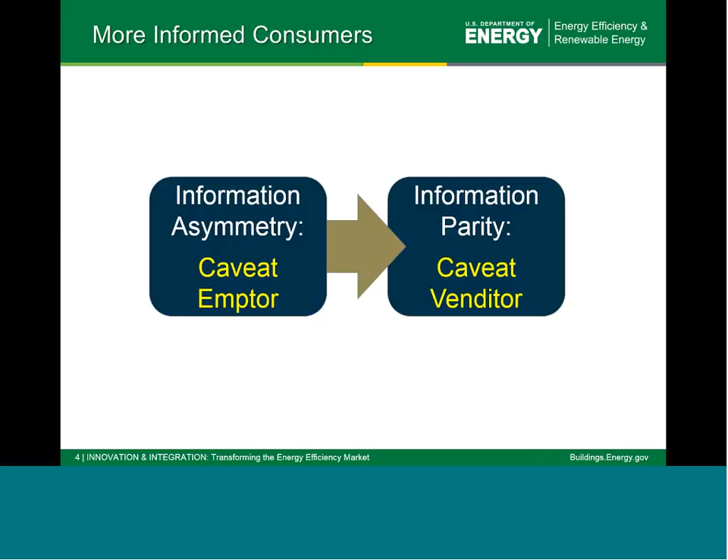What's really been a transformation in the marketplace has been this move from information asymmetry, caveat emptor, where buyers know less than sellers, to information parity, caveat venditor, where buyers know as much as sellers. We're seeing more and more that there are so many different business models being substantially impacted by this transformation. Let's look at some of the things buyers will know that will affect us.

One of the things buyers will know for sure is thermal defects. A good infrared diagnostic camera used to cost about $30,000 or more. Today you can get a good one for a few hundred dollars, and there are ones even less that you can clip onto your smartphone and get reasonably good infrared images of homes. That's significant because infrared images are really effective at communicating defects to a lay audience like a homeowner.

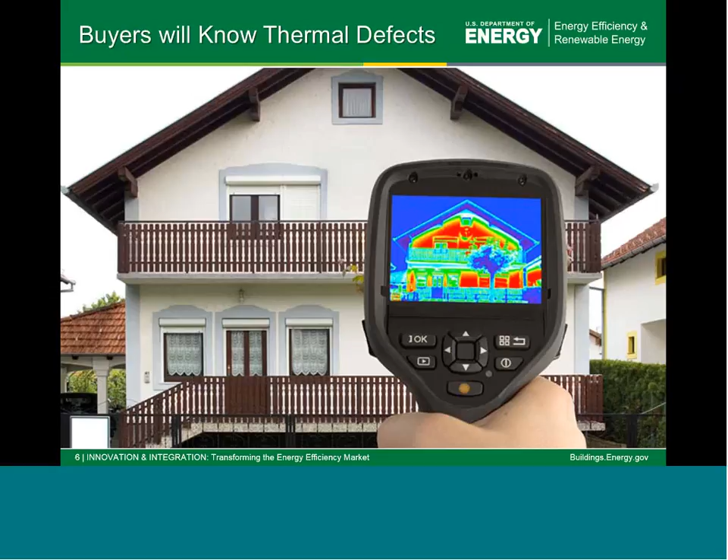I don't have to be an expert homeowner to look at this image and know something's going on that's wrong in my house. In infrared images, light colors are heat and dark colors are cold, and on a cold day to see all that heat exploding out of the wall system is not a good thing. So that's one thing the infrared camera can do, but it's an even bigger thing how it's going to spread. And it's just one example of one business.

Essess is a company out of a group from MIT that's developed not just an advanced way of doing camera diagnostics, but an advanced way of using computer technology to interpret the images from the camera. So what this company does is they strap a really good camera to the top of a RAV4.

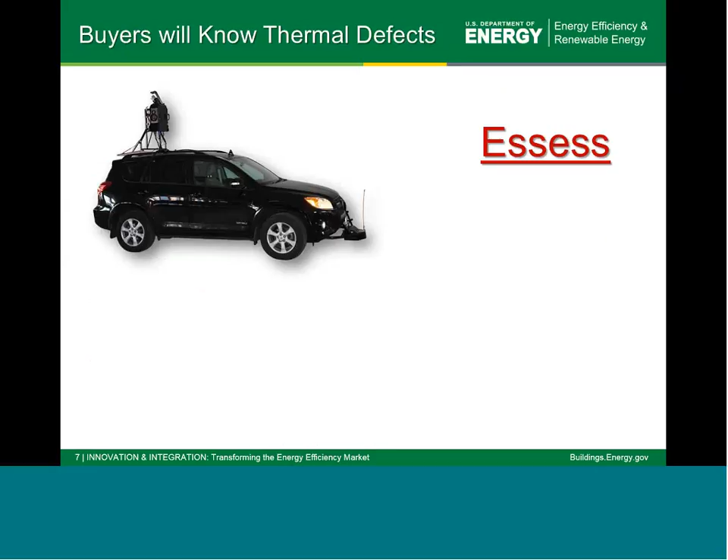They can drive through an entire community in 1 or 2 days and virtually map that community, getting images home after home. In this case, Cambridge, 2 nights, an entire diagnostic of all the buildings in that community.

Of course, the red on a cold day is not good to see heat coming from the buildings, and the blue is better that the heat's being contained inside the building. So for a utility client, you'd have a great way of knowing where

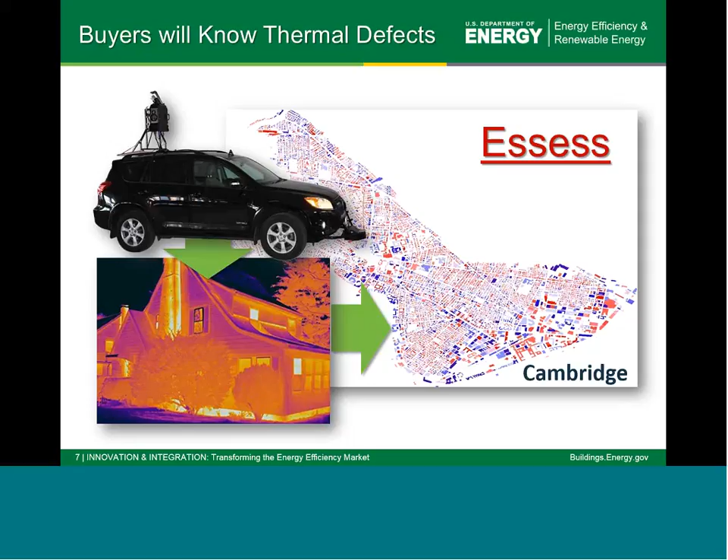to focus efforts to reach out for retrofit work. But the key thing is the interest in this company to virtually do reports on homes and communities across the entire country. So again, buyers will be so much smarter about thermal defects in homes.

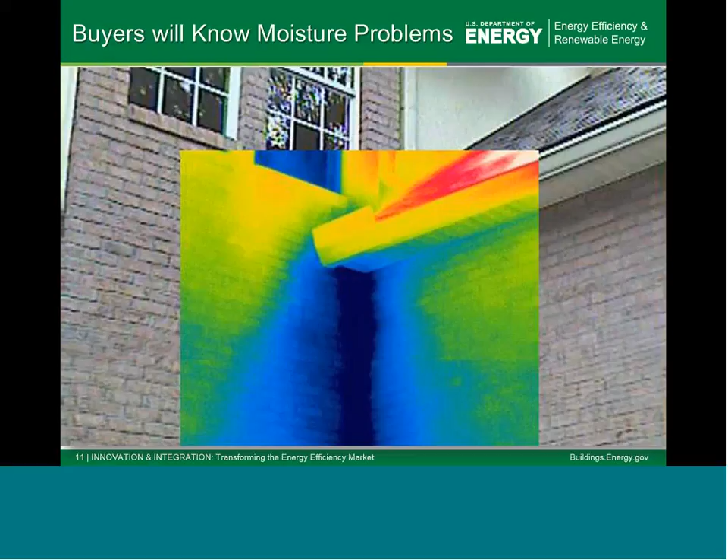And I would submit that there's an incredibly high percentage of residential construction without kick-out flashing. Even worse is the percentage of construction without pan flashing at windows and doors. 100% of windows and doors leak, so if they leak and they leak at the corners, we know that there's a real high-risk opportunity for moisture damage if we don't have good water protection details.

So the confluence of those two defects, and we know moisture problems as consumers, that will affect the value of buildings and our willingness to buy these buildings as well. And the same diagnostic on the inside will show where these moisture problems are being realized internally, and we can see them as well there.

So again, we know thermal defects and moisture defects. We're also going to know a lot about indoor air quality because we'll be smarter buyers, because very simple applications for smartphones and computers will be able to tell us in an instant where we have issues with key contaminants

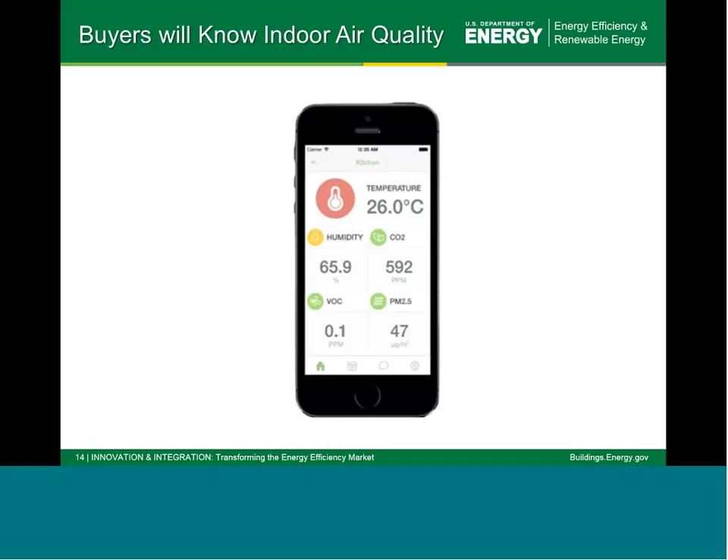that occur in our homes. Humidity, CO2, volatile organic compounds, particulates—those indicators will show up on our very simple applications that we get on our phone. Sensors are getting lower and lower cost, and all these applications are already appearing in the market, even bigger, more dashboard-type designs for showing the air quality in our homes with alerts and all sorts of other information to make consumers smarter. So we will be smarter about indoor air quality.

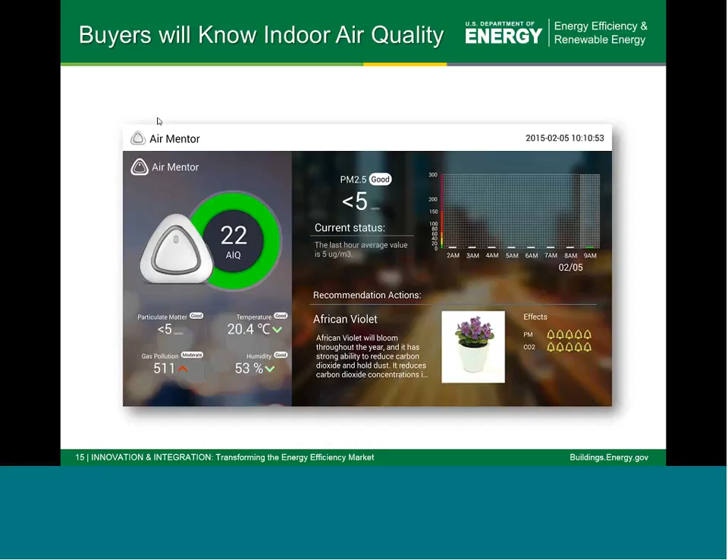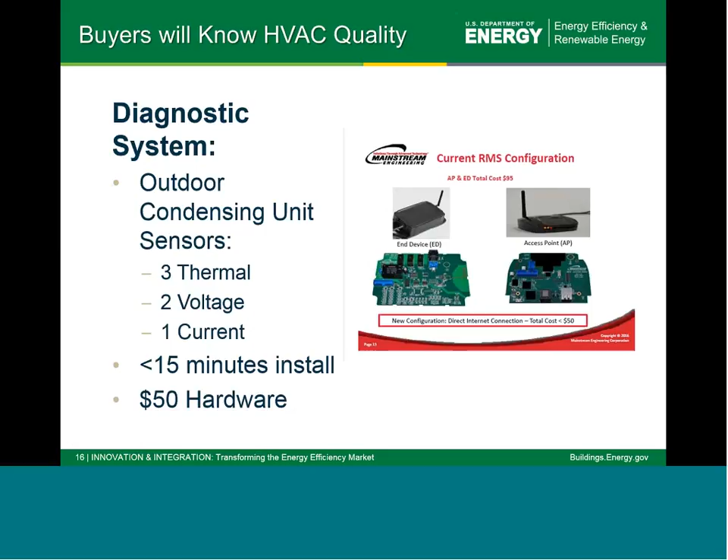And they basically put these on the equipment for 15, 20 minutes and then hook you up through the internet to their monitoring devices. They can tell you if you have low or high charge, failed start or run capacitor conditions, reduced condenser or evaporator flow for refrigerant, abnormal operation, and if your performance isn't meeting what you were promised when you bought the home or new equipment.

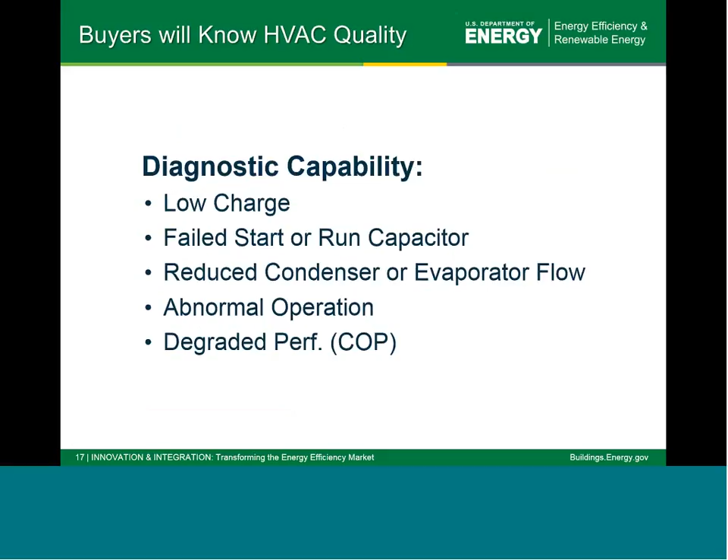So now, where we have a reality that systems aren't installed per manufacturer specifications, we'll have a much increased capacity for consumers to be smarter about whether they got what they paid for. So lots of new challenges for remodelers and building owners, and dashboards will appear here too that help consumers know when things are not as they should be.

All this will lead up to eventually where we start having more ability for consumers to get reviews of homes. Right now it's pretty limited, but my wife and I won't go to a restaurant in a new area without pulling up Yelp or TripAdvisor and getting reviews, menus, and information that makes us smarter picking a restaurant. Well, that's just a $20 or $30 meal. This is a $300,000, $400,000 purchase.

You can be sure that the review options for what we can check will get higher and higher. It's great when they're good reviews, but there are also going to be lots of bad reviews. We as builders have to be conscious that this is a smarter consumer that will know how our buyers feel about our product, and they'll also be smarter about the performance of homes.

We have a lot of great labels in the marketplace, and these labels will be used at a higher and higher level. We have the energy efficient label with Energy Star, the HERS rating, Zero Energy Ready, PHIUS, green labels like LEED and NAHB, Water Sense as a water label, Indoor Air Plus for air quality, and fortified as a disaster resistance label. All these labels will grow in awareness.

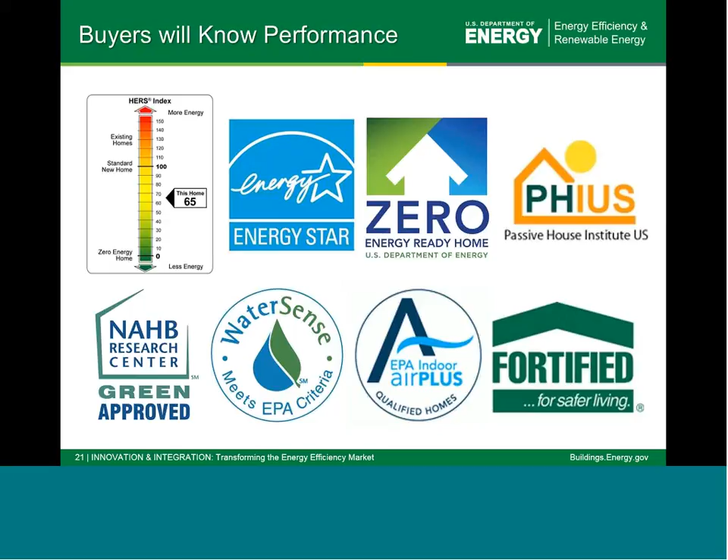Consumers will know that there are simple triggers to make them smarter about what they're buying. Again, a much smarter consumer, and they'll see these labels as builders get wiser to posting them in an aesthetic and obvious way when people come up to their homes, or at least the model homes for sure. So we will know more about performance.

One more thing about these smarter consumers is that they're willing to pay for a better experience, particularly if it's transformational. Consider some marketplace realities: we pay 2 to 3x for a daily break we think is better. When we go to Starbucks or another boutique coffee shop, we're spending $4, $5, $6 for coffee versus a third or half the price at a discount convenience store. For the experience, we'll spend 2 or 3x for a better daily break.

Similarly, for health, we're showing over and over that we'll spend 2x or 3x for a better health experience. Before Chipotle made the mistake of not controlling quality, they were easily 2x for fast food versus a conventional fast food restaurant. You can just look at the marketplace spending $40 billion a year on organic food, $20 billion on bottled water. The willingness to spend for health is everywhere we look.

And when we do a great job of combining technology and design, 10x is an easy price increase we see. We were very happy with our cell phones, then out came the smartphone, and we lined up around the block to spend 10x to go from a cell phone to a smartphone. A transformational experience has an incredibly high willingness to pay if we're smart about what we're getting. So just that as a beginning to our discussion, it's really important to recognize we're getting smarter buyers.

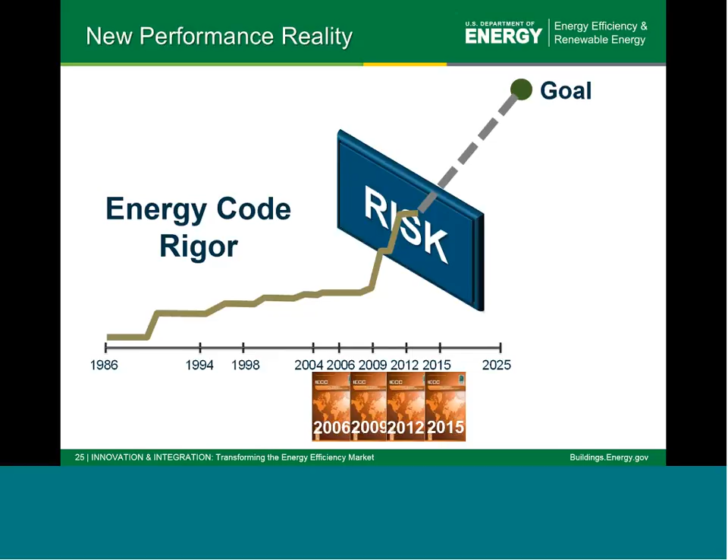But right at the juncture we are at today in terms of how efficient we make our homes, I'll say we've hit a new risk reality that has to be addressed, and that drives a lot of the benefits for doing zero. Let me explain how that works.

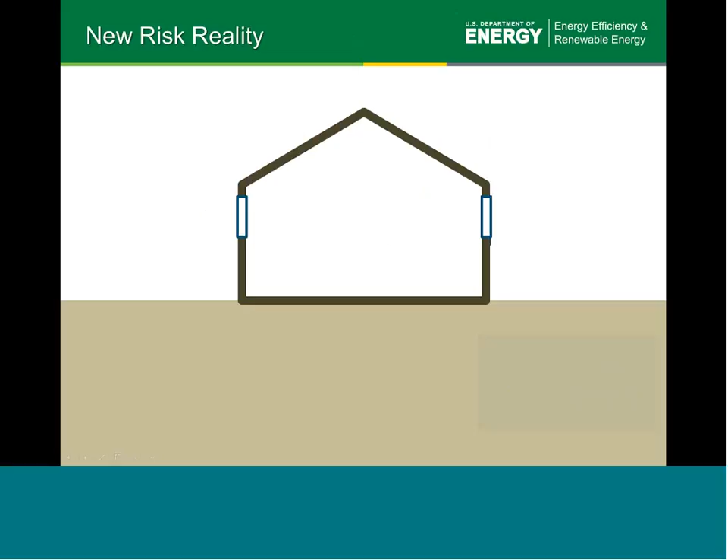We used to build with much less insulated, much less rigorous windows and air sealing. Then along comes more rigorous codes, with movement to much lower HERS index scores. With that comes more insulation, better windows, and more air tightness. That's what I call the advanced enclosure.

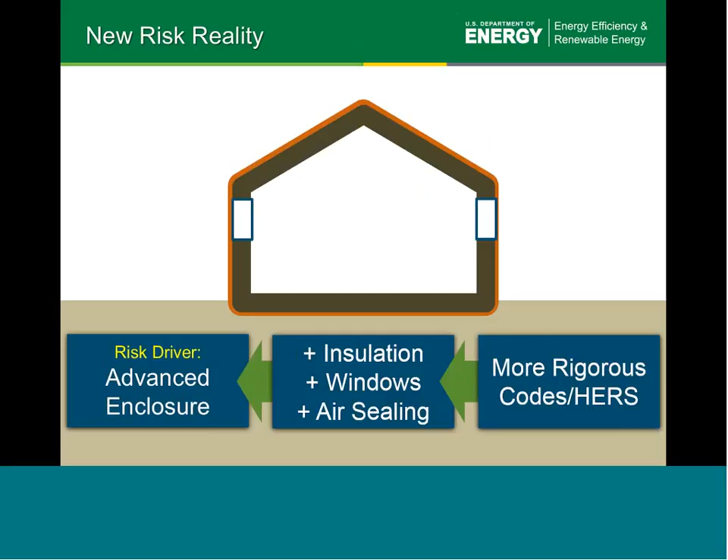And that advanced enclosure is a very significant risk driver if you have anything to do with new homes. Let's explain how that works.

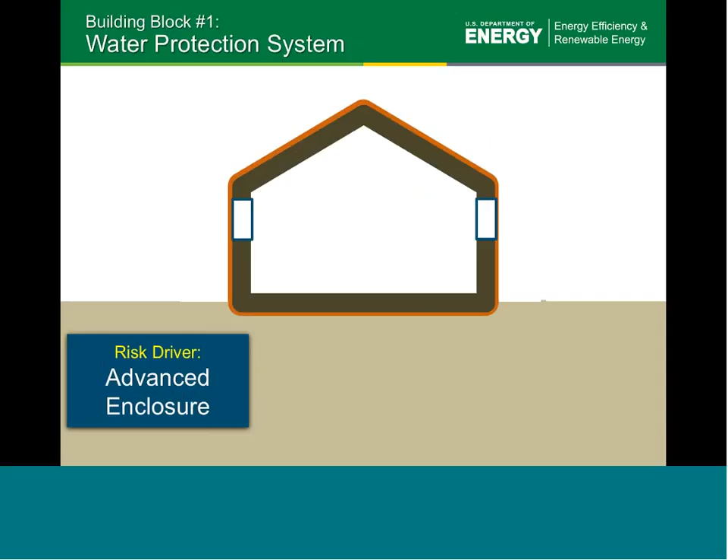First, the first building block for Zero Energy Ready homes is, because of the advanced enclosure, we need a water protection system to manage our risk. With better insulation and air sealing, we're now creating colder surfaces inside our cavity at the outside sheathing in cold weather and the inside drywall in warm weather.

Along with that colder surface, we have less drying potential. With all the additional insulation, wall assemblies cannot dry nearly as fast as they could with little or no insulation. So the challenge is we now have more wetting potential that has to be managed. It's not extra credit—it has to be managed to manage risk.

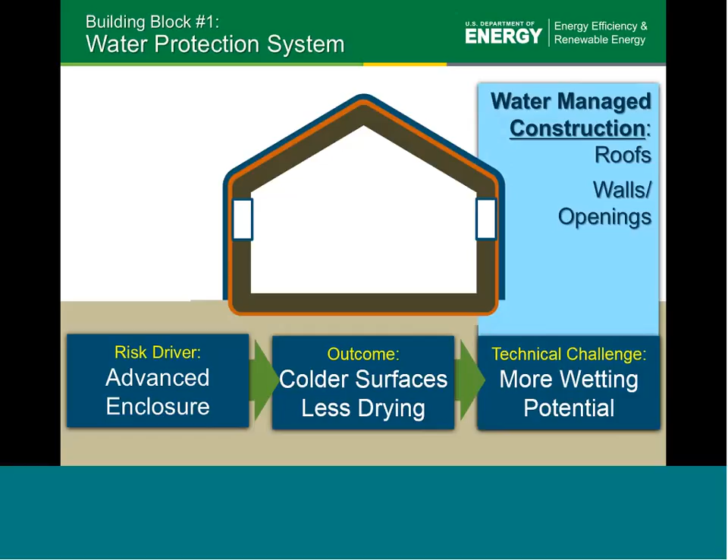So water managed construction is an absolute necessity. It's water managed roofs that have complete flashing and extra membrane details to protect the roofs, walls and openings with weather barriers and flashing details. The site and foundation have to be managed more carefully in terms of slopes and foundation details.

And then inside the home, where we have surfaces that can get wet, particularly in outside walls, we need to manage the materials and how we install them to keep water out of the wall assemblies. So water managed construction is now a complete system that has to be on every home.

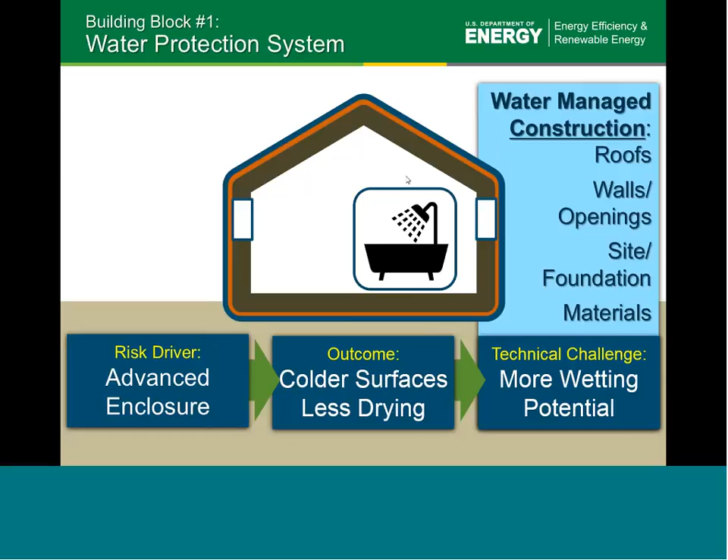We don't believe it can be driven by points. It needs to be a complete checklist that has to be addressed. Building block number 2 is managing the comfort risk with an optimized comfort system.

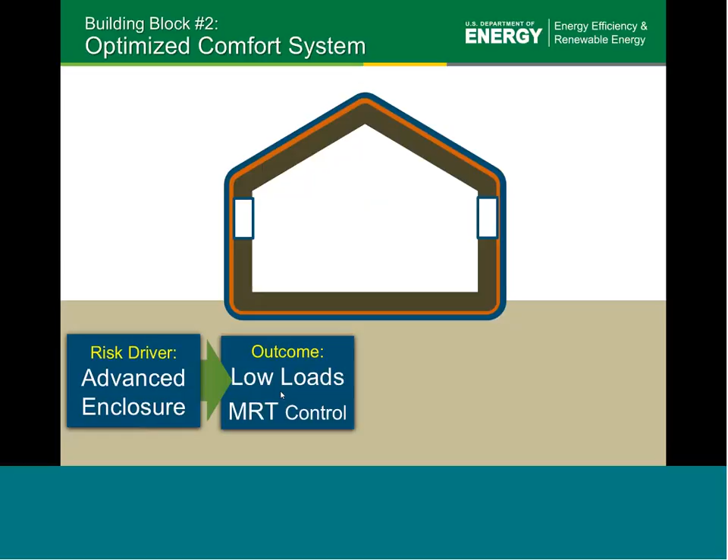Why is there a comfort risk? Well, with the advanced enclosure, we have very low loads, which is good. And with the advanced enclosure, we have much improved control of the mean radiant temperature, which is great—mean radiant temperature dominates our perception of comfort.

But what also comes along is much reduced airflow since the loads are so much smaller, and much longer swing seasons since the sensible heat gain is much reduced. When that happens, we have a challenge managing mixing throughout each room with less airflow, and a challenge managing relative humidity when we don't start sensible cooling until later in the year, even though there's latent cooling needs earlier.

So we maybe used to start air conditioning late April, early May. Now we don't do it until early June, and we have a whole month where we could still have high latent loads, meaning we have to have a humidity strategy for our comfort system. So now we need a quality installed, efficient HVAC system.

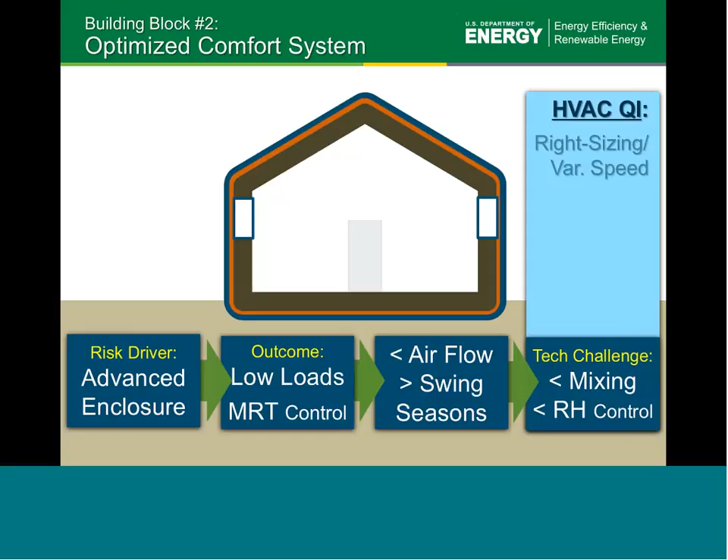It has to be right size, variable speed to manage our loads and also manage humidity capabilities. We need ducts in conditioned space for efficiency and performance. We need proper installation so the systems have mixing and balancing, and we need to make sure we're complete.

In many markets where it gets hot and humid, we need whole house dehumidification, or equipment that knows how to effectively provide dehumidification when there's no sensible load. We also need pressure balancing, because these homes have to make sure that room by room we can maintain comfort when there's a central return.

So the optimized comfort system is not extra credit. We believe it's not points. It's a whole package that has to be in every home.

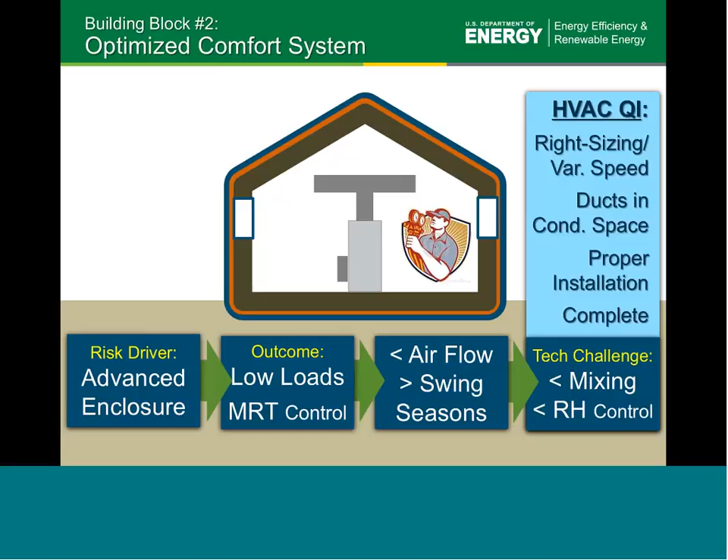Building block number 3 is a complete indoor air quality system to manage the risk of extra contaminants. With the advanced enclosure, we have less air exchange because it's tighter, and therefore we can accumulate more contaminants. So it's critical to have a full package.

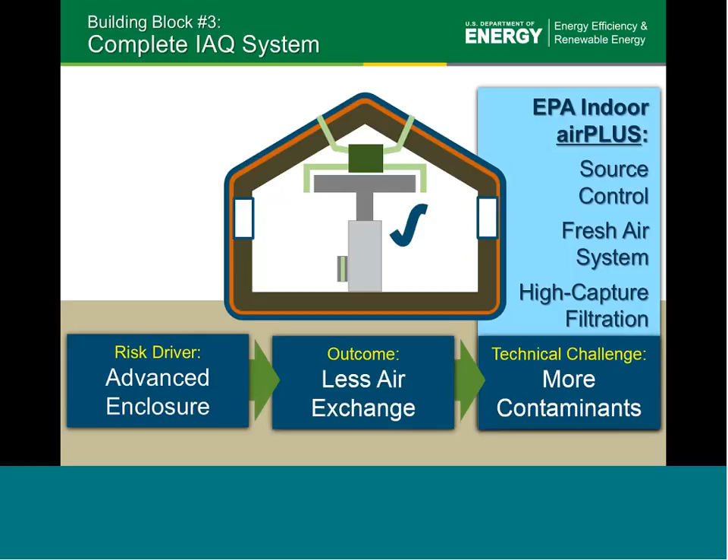We reference the EPA Indoor Air Plus package that gives us complete source control throughout the house. It also dilutes any residual contaminants with a whole house ventilation system, and has high capture filtration at the return air filter that really effectively removes particulates in the airflow. So this is a complete system that should be in every house, even a code home built today.

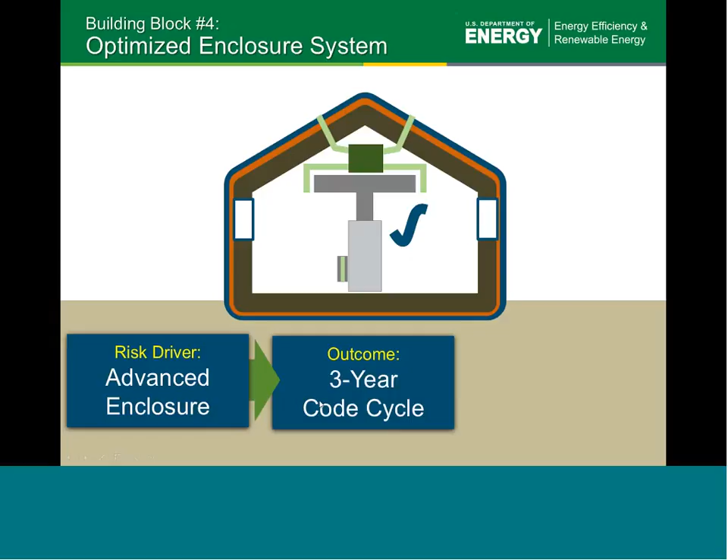Building block number 4 is an optimized enclosure system, and this is really to manage the risk of obsolescence. We know that the code cycles every 3 years, and therefore we have a challenge for near-term obsolescence. In 3 or 4 years, I can have my most expensive purchase of a lifetime be virtually illegal to build, because the next code cycle kicks in.

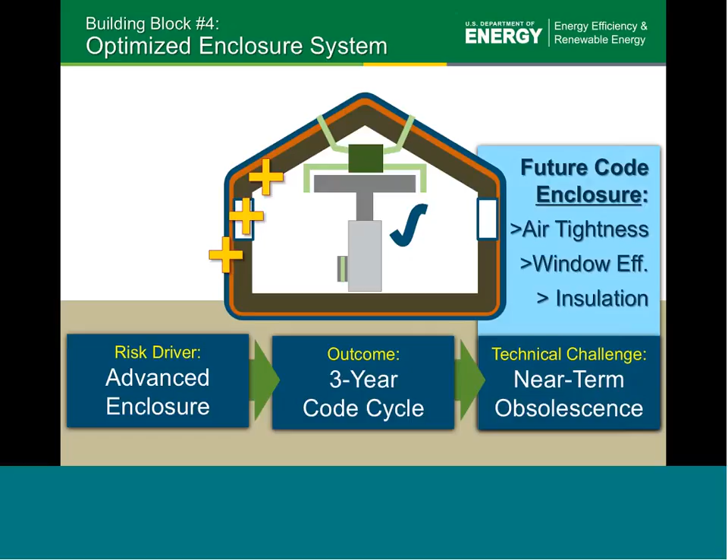So the way we manage that risk is we just build to the next code, whatever that code is on the books. For Zero Energy Ready Home, that's a 2012 or better IECC energy code, which will result in more air tightness and a better window and better insulation. That is something we believe every consumer would want, if they knew they had the choice to get the 2020 model house in 2016.

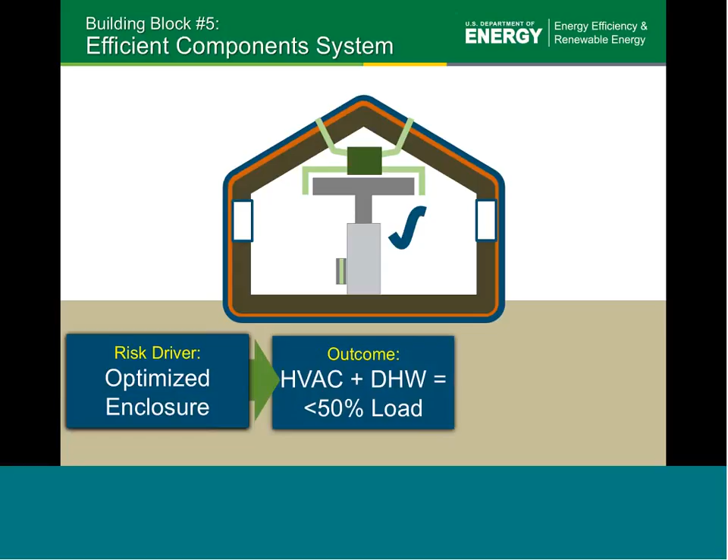Building block number 5 is to build on that optimized enclosure and put in efficient components throughout the house, recognizing that the heating, cooling, and hot water loads are now less than half our energy use in homes today that are high performance. So the challenge is to minimize the energy use of these components down to a substantially lower level, and we do that with efficient equipment, lighting, appliances, and fans throughout the house.

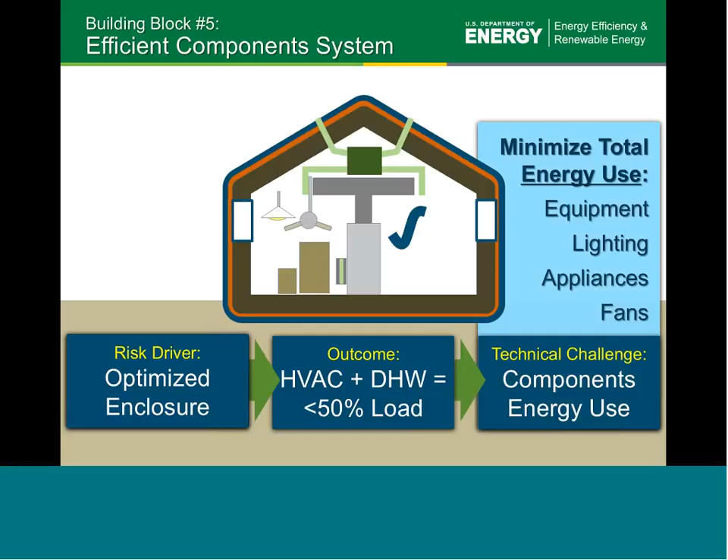The same improved energy efficient equipment also usually performs better, lasts longer, and is usually made of higher quality components that every consumer would want.

And the last building block is to recognize that the cost of solar systems is dropping rapidly. The infrastructure to provide them is increasing, while also reducing the cost of installation requirements. So every home would want to manage the risk of being able to add a solar system with minimal cost or disruption, and that's achieved with a solar-ready system.

So we start with an optimized enclosure. Now we have the ultra-efficient HVAC and components to further minimize the energy requirements down to the lowest level. And we now have the challenge to go zero ready.

We do that with solar ready construction: simple details like giving the homeowner the structural calculations that verify the roof can handle the loads of the collectors, without having to go back to an engineer at some point in the future at a very high cost.

Having a place to run wiring through conduit from the attic to the electric box, a place for balance of system components, an electric panel that has extra capacity with 1 or 2 circuit breakers needed for the future solar installation. These are very low, no-cost improvements, and now we can add the solar system with minimal disruption or cost penalty.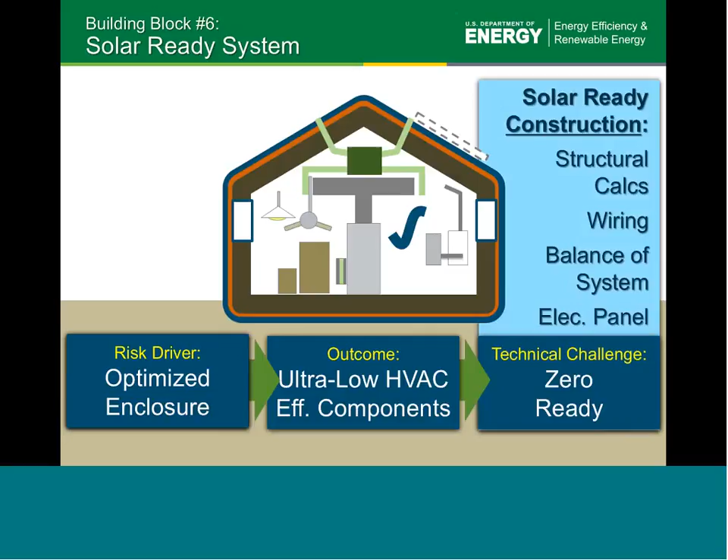So there we are. We have a zero energy spec based on 6 complete systems we believe every homeowner would want. They would want to go from an advanced to an optimized enclosure and get the 2020 model home today. They would want complete water protection, which is always a big concern of every homeowner, an optimized comfort system, a complete indoor air quality system, efficient components, and solar-ready construction, which we call a house to the power of 0.

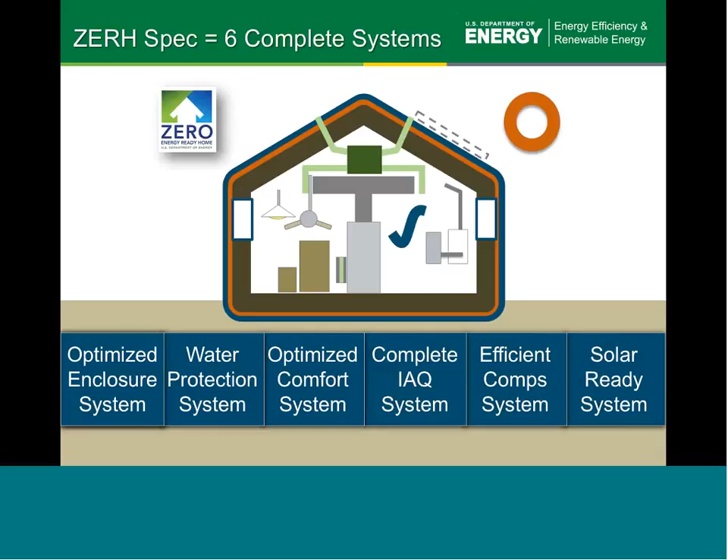The Zero Energy Ready Home basically is a way for the consumer to get this incredibly transformational experience by simply looking for a logo. That's the Zero Energy Ready Home program, and the definition is very simple as well: it's a high-performance home, so energy efficient, that all or most of the annual energy consumption can be offset by renewable energy.

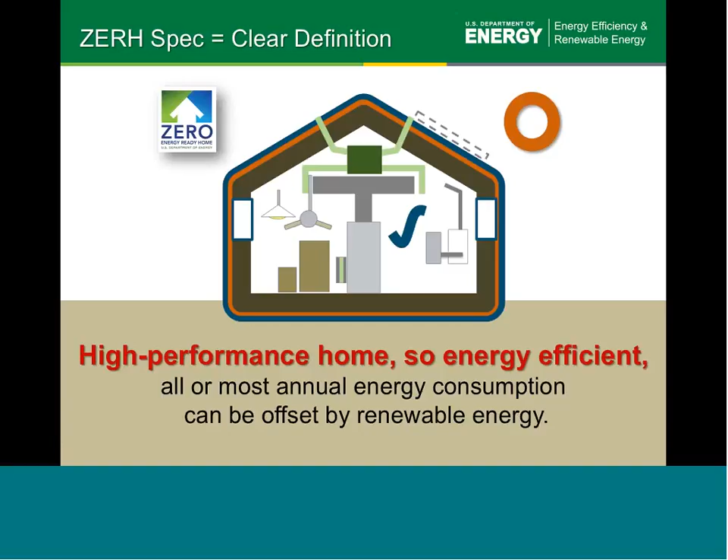Okay, so how do we message this powerful value proposition to consumers? We've used 3 principles. One is we need a simple core that we always can use to tee up our message in a way that has a very profound value to our audience. Then we have to earn their trust, and then we have to have clarity in our value message. There has to be no doubt that there's an absolute benefit they can understand without complication. So I'm going to show you how we do this very simply.

So we start with the simple core of the Zero Energy Ready Home. We thought, what is it really about Zero Energy Ready homes that's different? Yes, they're more efficient, comfortable, durable, healthy - but that's like most high-performance homes. We thought what was critically different is that it's based on the best practice and technology recommendations from the best experts in the nation, working with the DOE Building America program.

Then we further polled hundreds and hundreds of experts at a whole array of venues, asking what would they prefer - a code home, an Energy Star home, or a Zero Energy Ready home - and virtually all would choose a Zero Energy Ready home if it was side by side the same exact architectural option.

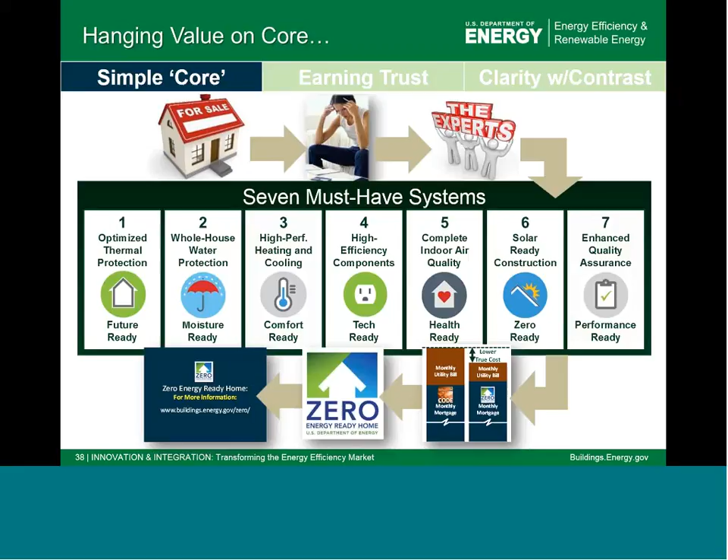So that's our very short message. It all hangs on this: this is what leading experts would choose for their own homes. And so that's our power message.

Now, trust. Nearly 1 in 3 consumers indicate they don't trust home building and real estate companies. That's the only research I can find in this industry, but my field experience shopping tens of thousands of homes worth of construction reveals it's probably more like 3 out of 4 consumers don't trust home builders and real estate companies. And it's not because these are bad people.

It's because we only buy a home once every 7, 8, 9, or 10 years. We're not out there every day having experience with that transaction. We don't know what that transaction is. We're so fearful buying homes, and there's so many steps along the way where trust is always challenged. It's more a function of this being a very difficult purchase.

And what's great with some products is the brands are powerful and consumers can just bank on them and know what they're getting, and they're loyal to those brands. That's not us. The Zero Energy Ready Home provides trust by being an independent voice of authority versus a builder saying, trust me, I'm a zero builder or a high performance builder. Now you're a builder associated with the Department of Energy's guidelines for excellence, and it's a completely different way of presenting where you are within the housing industry.

Here's an example. One builder, Newtown Builders, has since changed its name to Thrive Home Builders, is very prominently featuring Zero Energy Ready Home, when they became the first builder at Stapleton in Denver to go 100% Zero Energy Ready Home with their homes. And now it wasn't just them saying they were doing something special. They were in a select group, 1% of builders in the country, showing they can build to this level of excellence.

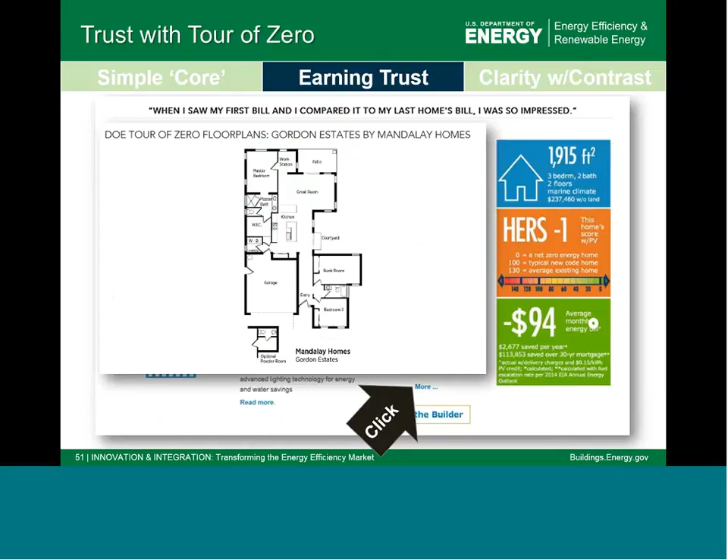Often there are videos that can be clicked on, and if you click on More for the floor plan, whatever detailed floor plans we have will be provided so people can spend more time with those. And then lastly, if you like the builder and want to meet the builder, you click on that, and it takes you to our locator tool page for that builder. All the builder partners have a page on the locator tool, so you're being featured not just on your website, but on the DOE website as a Zero Energy Ready Home partner.

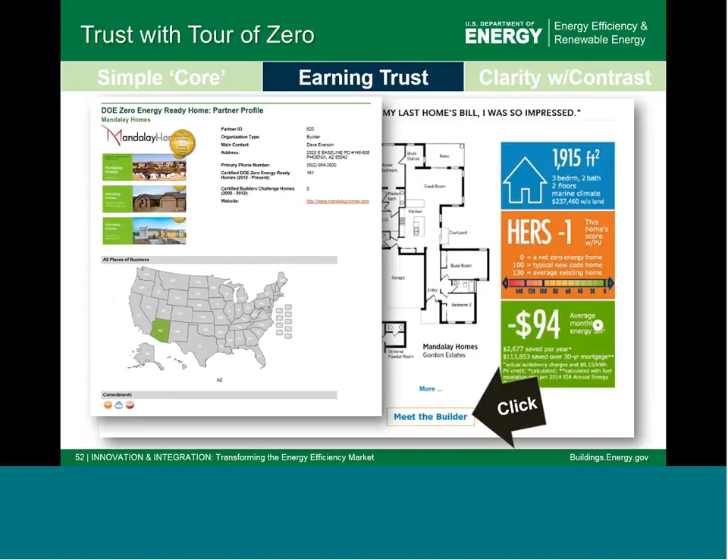Maybe I should trust this builder more. So it's another tool for earning trust.

And lastly, for earning trust, we know a lot of builders have trouble either saying messages about performance because there's some concerns about what they can and can't say, or they just want a voice of authority to have more impact. So we have drop-in messaging, two full pages of quotes that can be dropped into material.

And there's a quote, in this case from me, sometimes it's DOE, but you get the idea here that if you want to earn trust, it's great when you have others saying you're really special. So that's enough about trust.

The other thing we focused on, I mentioned, is clarity with contrast. And we have lots of things better about our homes, and they live, work, and last better. They have designer comfort and health ready. We mentioned low bills, technology, quality, enhanced durability.

But what does that really mean to me if I'm a buyer? Those are interesting concepts, and many, many programs speak to them. So what am I really getting with a Zero Energy Ready home? And then I'm also working with an exclusive builder. I have this home of the future thing that's being talked about, and so it's telling me it's a smart purchase because it's lower cost of ownership.

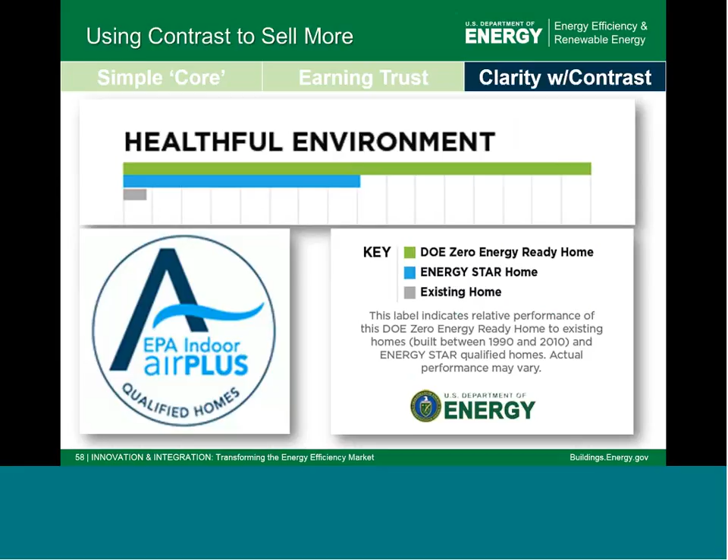Now, there are 3 bars, and the green bar is the DOE Zero Energy Ready home. The blue bar is the Energy Star certified home built to its program specs, and the gray bar is an existing home. Those points of reference are provided because you wouldn't be buying or building a Zero Energy Ready home if you weren't first Energy Star. In fact, it's a prerequisite for our program. And also, we want to make sure people understand the contrast between buying a new Zero Energy Ready home and an existing home. So those are the 3 points of contrast that we provide.

And what we're able to say in a message very simply is, Mr. and Mrs. Smith, I'm really sorry to hear that you struggle so much in your current house, but I feel great to tell you that each and every home that we build is a Zero Energy Ready home with a healthful environment. What that means is we have 100% of the recommendations by the leading experts for health in our nation, the U.S. Environmental Protection Agency. We have 100% of their recommendations for families to breathe better in their homes. In contrast, the Energy Star home has about half those recommendations, and an existing home hardly any.

Wouldn't you agree, when you're buying such an important purchase for your family, you want to have all that protection for your children? In fact, we have the Indoor Air Plus label, which also verifies we have all the expert recommendations for health in new construction. Now I understand clarity. Do I want all, half, or hardly any of what experts say should be in every new home to help us breathe better?

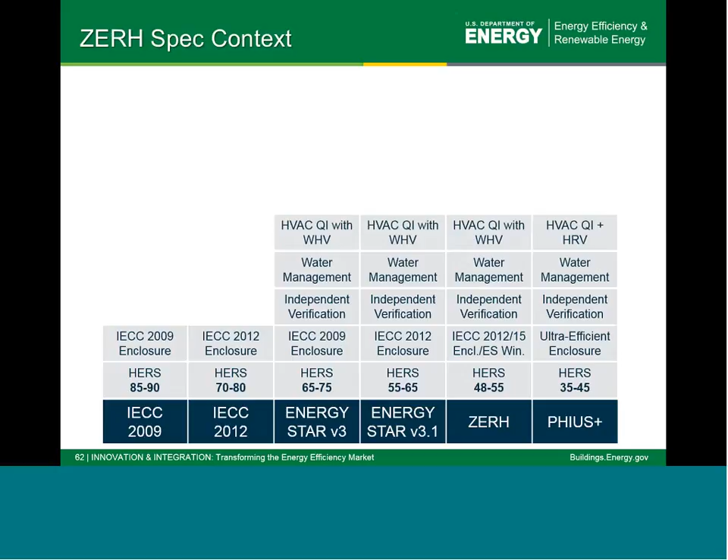Then you have independent verifications required for all the above code programs. Water management is required for all of them too, because Zero Energy Ready requires Energy Star as a prerequisite, and PHIUS requires Zero Energy Ready Home as a prerequisite, so those things just scale right across. Same thing with HVAC quality installations required in Energy Star, so it's required basically in Zero Energy and Passive House as well, along with whole house ventilation. Ducts in conditioned space is required in Zero Ready, so it's also required in PHIUS, along with the EPA indoor air package, efficient components, hot water distribution, and solar ready.

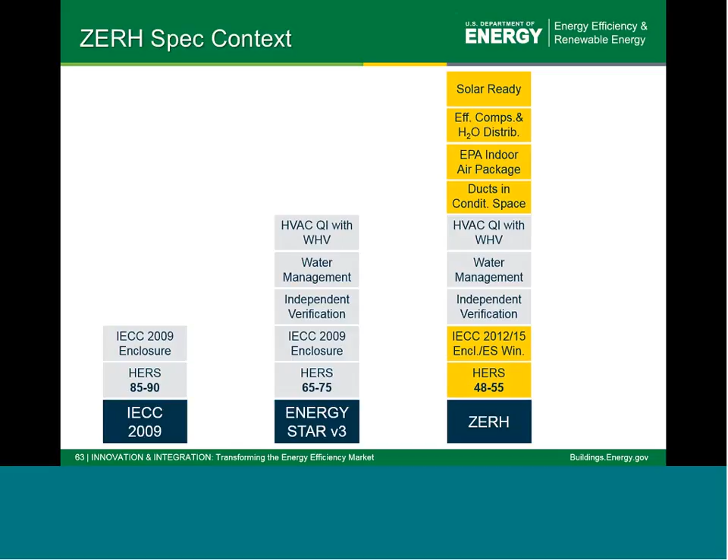So if I was going to show you the difference between code, Energy Star, and Zero Ready, these are the 6 key differences: the higher or lower HERS index score, the higher efficient enclosure, the ducts in conditioned space, the EPA indoor air package, the more efficient components, and solar ready. Let's focus on those to describe the program requirements.

First, because of the more advanced enclosure, we're more airtight. Here's Zero Energy Ready Home, we're about half of version 3 basically in ACH 50 requirements, 3 versus 6 for 1, 2.5 versus 5, and so forth, so basically we're about half the airtightness. And you can look at Passive House basically at 0.6 ACH 50 as the gold standard for airtightness.

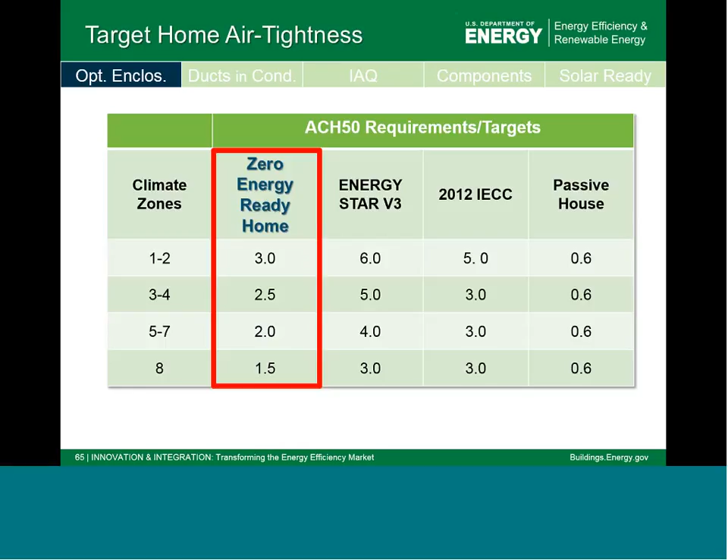Then you have the optimized enclosure in terms of insulation requirements. We're basically pegged to 2012 IECC, and 2015 is roughly the same. I showed this chart not to go through any of the numbers, but mostly to help you understand that the basic enclosure requirements are readily achievable by all mainstream builders: 13 walls in zones 1 and 2, 20 walls in 3 and 4, and 20 plus 5 or 13 plus 10 in zone 6 and colder. Give you a sense these are readily achievable constructions. Same thing with attics, from 30 to 49. So without going through the chart, I think builders are easily able to build to these enclosure requirements already on the books.

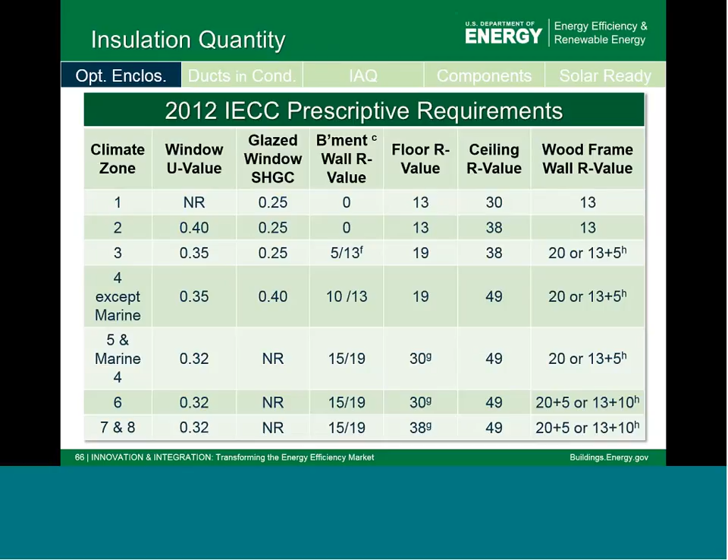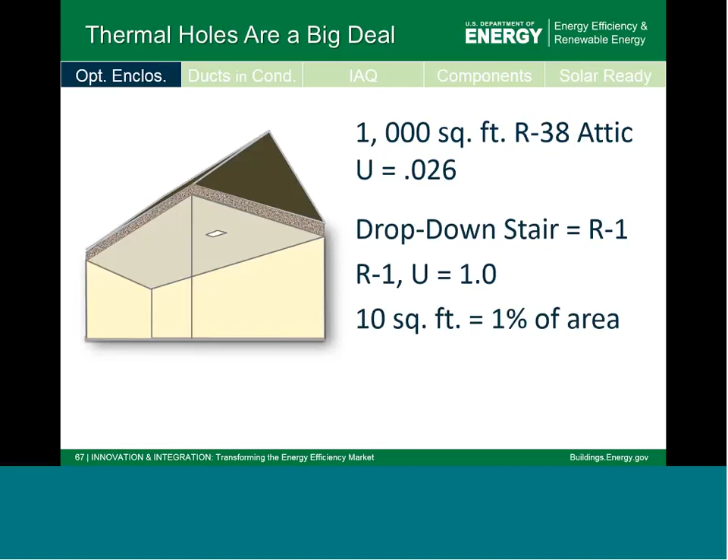I want to also stress how important fixing all the thermal holes are, it's such a big deal that we get rid of thermal holes. So here I am in a house, let's say with a 1,000 square foot attic, and let's say I have an R38 attic. My U value is 0.026, and I'm going to add a drop-down stair in that attic, and that's about R1. The U value is the reciprocal, same one as well. It's only about 10 square feet of the 1,000 square foot attic interface, so it's 1% of the area. The question would be, what impact does it have for a 1% hole in the overall R value for the attic?

So I'll run you through quick calculations. The equation for average U value is U value for area 1 times area 1, plus U value for area 2 times area 2, and so forth, divided by the total area. So we have 0.026 for the main R38 attic and 1 for the drop-down stair, times the relative areas, and we wind up with 0.036 U value for the combined area with the hole, which is about R28.

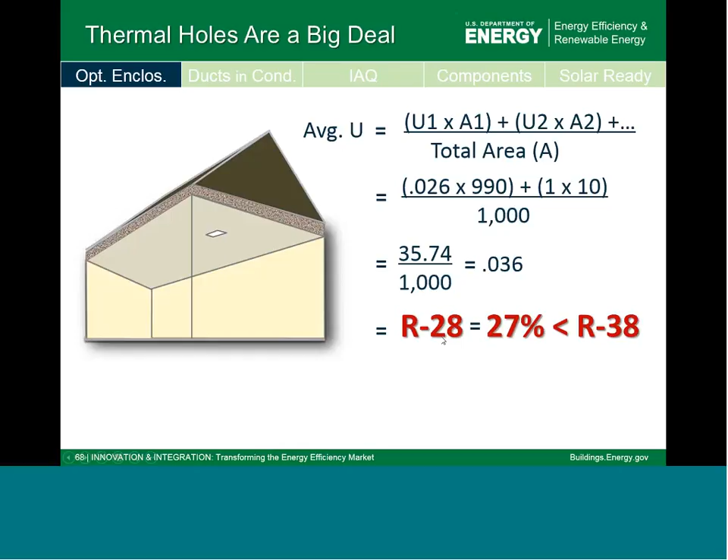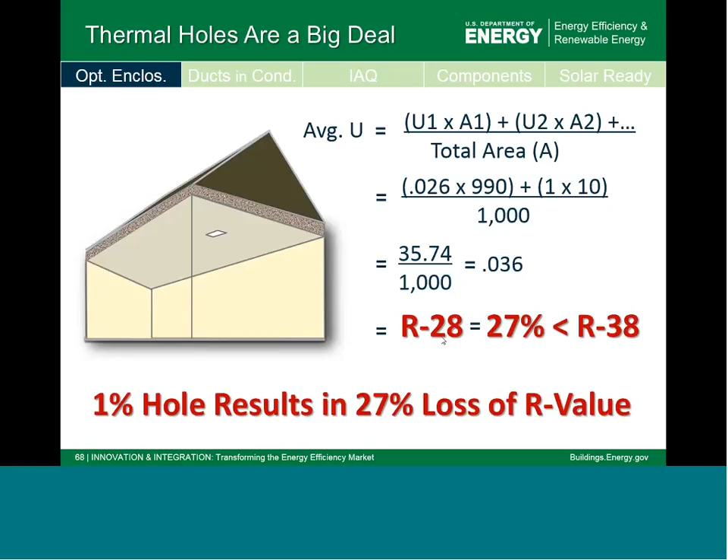So the 1% hole winds up with a 27% loss in R value, simply running the math. Thermal holes are a big deal. They allow a lot of flow through a very confined, smaller space at a higher rate of flow, and they result in a very significant impact on the performance of an enclosure.

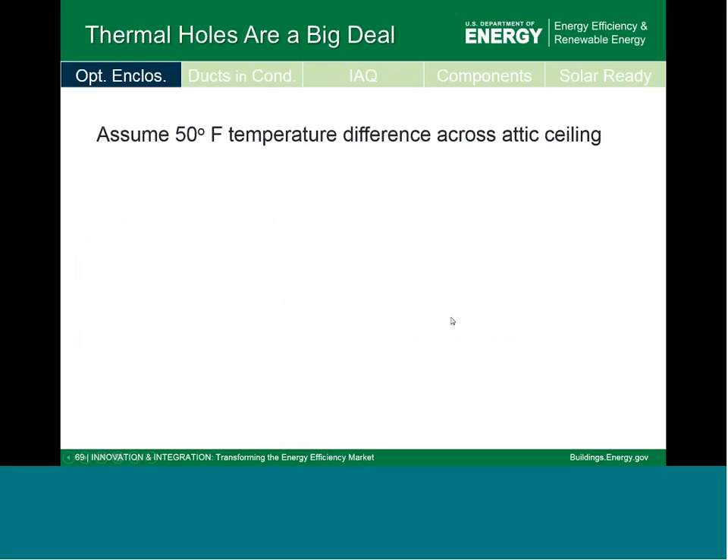Now, how much thermal flow is happening is a different equation. If we assume the attic is 20 degrees and the house is 70, a 50 degree difference, heat flow is U times area times delta T. We put in the numbers: 1316 BTU per hour without the hole, 1786 with the hole, using the different U values for with and without the hole. So we have 33% greater heat flow just due to a 1% hole. This is, again, a big deal to get rid of thermal holes.

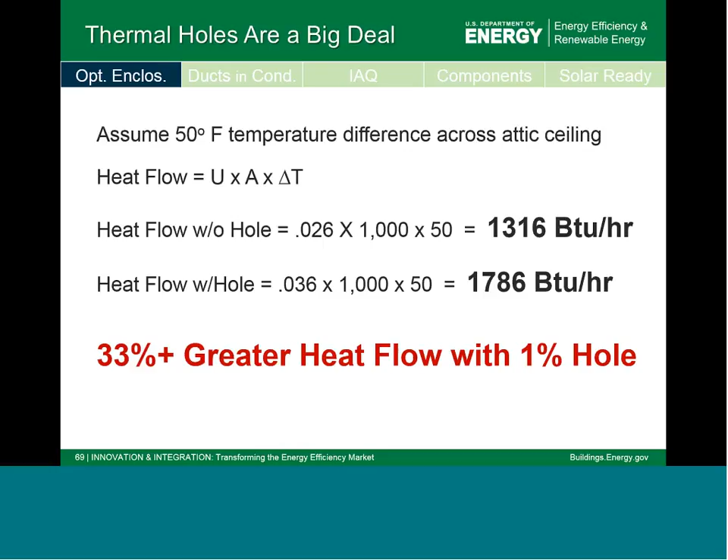And what is one of the biggest thermal holes in homes in cold climates? It's the window. Because we're doing such an improved job insulating walls, but we're still using Energy Star windows. Take this example: a chart I filled out crunching numbers for a house where the window is 15% of the wall area, in a cold climate. If I have a 6-inch R18 wall versus a 13-inch R39 wall, and an Energy Star window at 0.3 U value, I'm only getting about a 33% improvement going from a 6 to a 13-inch wall.

I'm going from R11 to R15 - not a very big return on investment. And more importantly, I can stick with a 6-inch wall, go to an R7 window, and virtually get the same performance as the Energy Star window with a 13-inch wall. So if you looked at the cost comparison, that's probably a dramatically lower cost to do that.

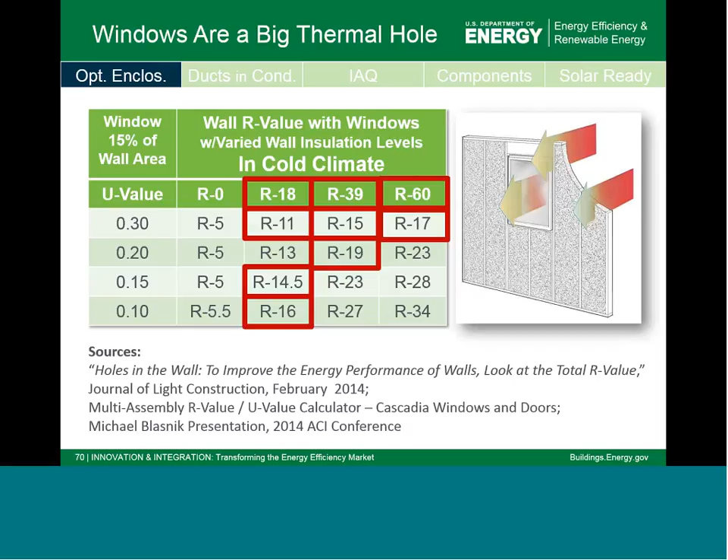And I can go to an R60 wall, which is like a 20-inch wall, and I'm only getting an increase from R11 for the 6-inch wall to R17 - a 50% increase for going from a 6 to a 20-inch wall. I can get a good chunk of the way there with the R7 window, and almost all the way there with the new windows coming out that are R10. Getting to really good windows is the most significant technology challenge for high-performance buildings. We need R7, R10 windows at better and better prices on the marketplace to truly solve the enclosure, because otherwise a thermal hole is undermining all the good work we're doing with the walls.

Okay, enough about the enclosure. What about ducts and conditioned space? Often we find it's not a challenge, but in some markets they're very much focused on that strategy for how they build, and they put the ducts in the attic. So we need to show there are lots of choices for how they can get the ducts in conditioned space.

One way is to have drop ceilings and a compact duct configuration, so you can have a drop ceiling in a hallway and then run short stubs to the bedrooms to provide comfort. Another way is to do a pop-up in the trusses and have a space that's sealed and lined with an air barrier - a top hat configuration in effect for your ducts, still inside the conditioned space.

Alternately, you can just insulate the slope, have an unvented attic, and make sure to have a supply to condition that space so you don't get too much humidity building up. Now the ducts can be up there and effectively in conditioned space. Alternately, you can run the ducts in an interstitial space between floors, particularly now as the ducts get smaller and smaller for the very reduced loads.

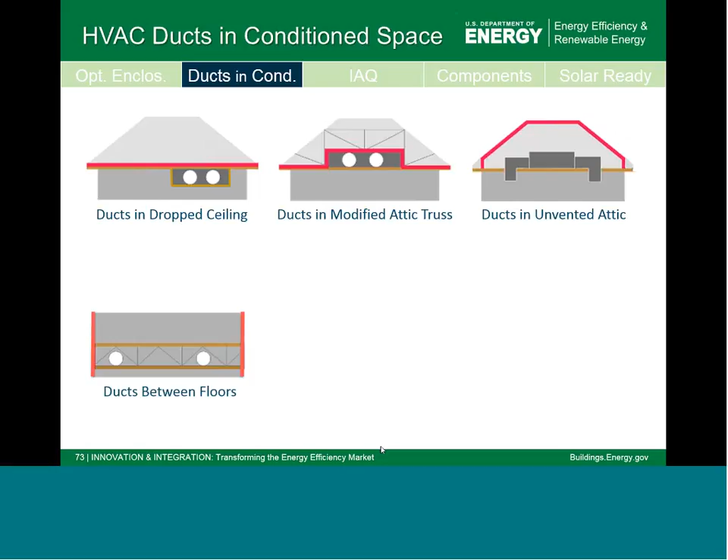There are other solutions like high-velocity duct systems that let the ducts get even smaller and easier to fit between floors. We can also have conditioned, unvented crawl spaces in basements and run ducts there. Or we can do a normal configuration of ducts in the attic if we bury them in insulation, encapsulating them in markets where condensation can occur in the ducts even with insulation around them. So lots of choices in how we can meet the ducts-in-conditioned-space requirement.

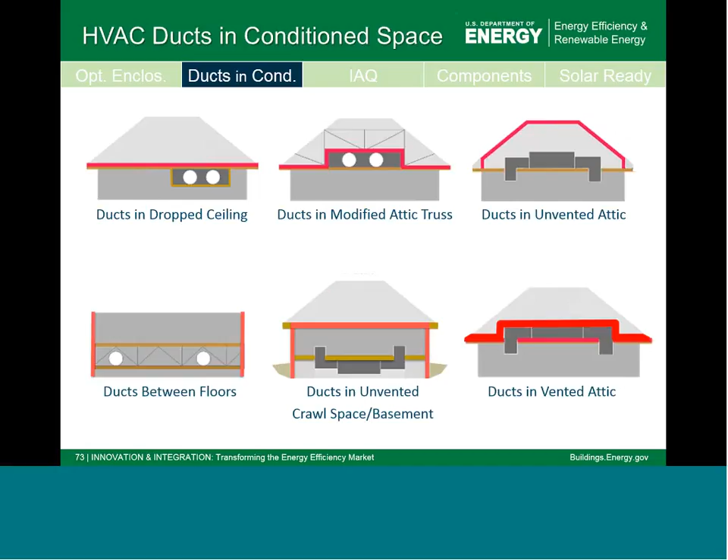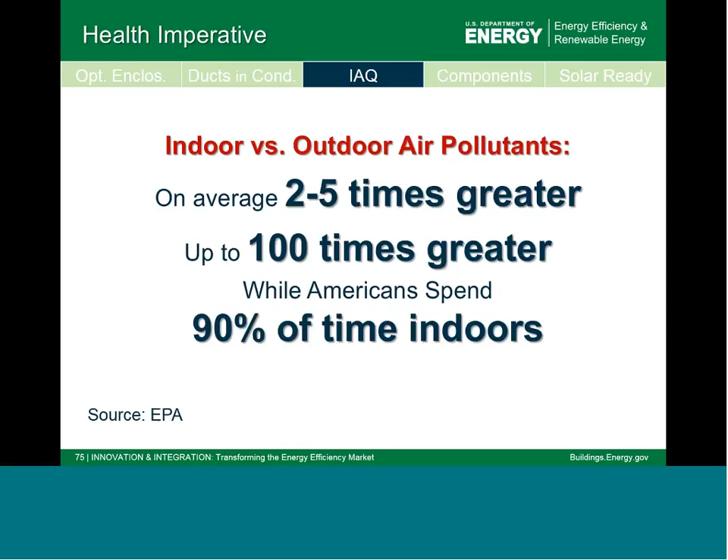Moving on to health, I call it a health imperative. We are no longer extra credit, even with code homes. The air inside our home has 2 to 5 times greater pollutants than outdoors, up to 100 times greater, and we're spending 90% of our time indoors, probably 66% of our time inside our homes. So getting that right is essential.

The statistics bear it out: 1 in 10 children in the U.S. suffer from asthma. So what we're doing is building on the good work that Energy Star starts.

It gives us a better envelope, particularly air sealing, keeping out lots of contaminants. The HVAC system has got ventilation built in. We do have the moisture control layers with the water management system, and we have more efficient combustion equipment that's direct or power vented. So it's a good start.

But there's a lot of additional measures from Indoor Air Plus that we add on top of Energy Star for controlling radon, pests, using materials that don't have chemical content in them, further reducing risk for carbon monoxide in homes, further improving HVAC requirements so they better control moisture, and having even more additional details to control moisture in the wall assemblies. This is what we call comprehensive indoor air quality protection.

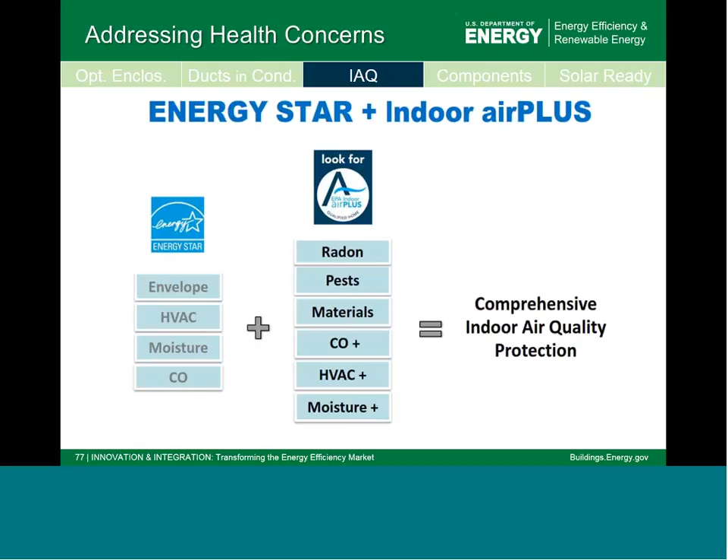And it's based on the leading experts, the U.S. Environmental Protection Agency Indoor Air Plus program.

Effectively, you wind up with a 3-pronged strategy: source control to keep moisture, radon, chemicals, combustion byproducts, and biological contaminants under control. Dilution and filtration happen with HVAC quality installation, and you get that with whole house ventilation, a higher MERV filter, and whole house dehumidification in hot, humid climates.

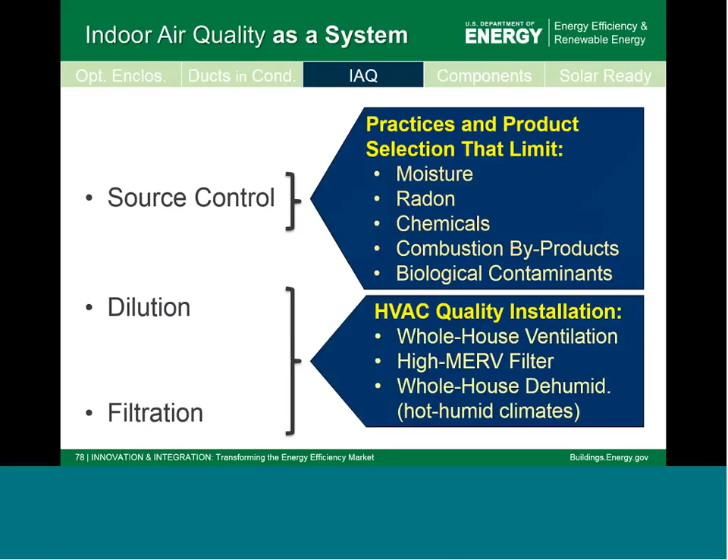Okay, moving on to the energy efficient components. Very simply, we peg requirements to Energy Star for appliances, fans, lighting, and then we also require efficient hot water distribution from the WaterSense program.

I'll spend a little more time on that because that's one of the requirements that gets the most questions for our program. But first, a word about the efficient water heating requirement.

You can use any water heater you want, but if it's not an Energy Star water heater, you'll have to make up the lost efficiency from other measures, because the performance calculations will assume this level of efficiency for your water heaters. So the performance calculations are pegged to Energy Star.

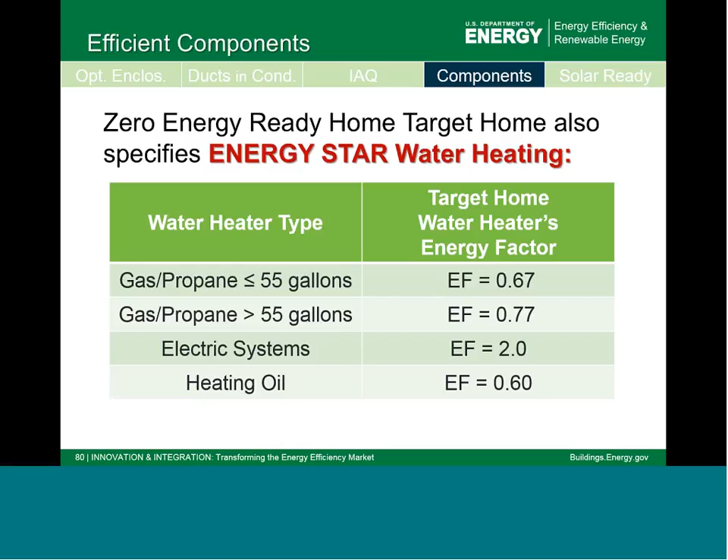These are the general efficiency levels for Energy Star water heating: about 0.67 for gas, 0.77 if greater than 55 gallons. Electric systems have to be essentially a heat pump water heater with an energy factor of 2.0, and heating oil systems can have an energy factor of 0.6.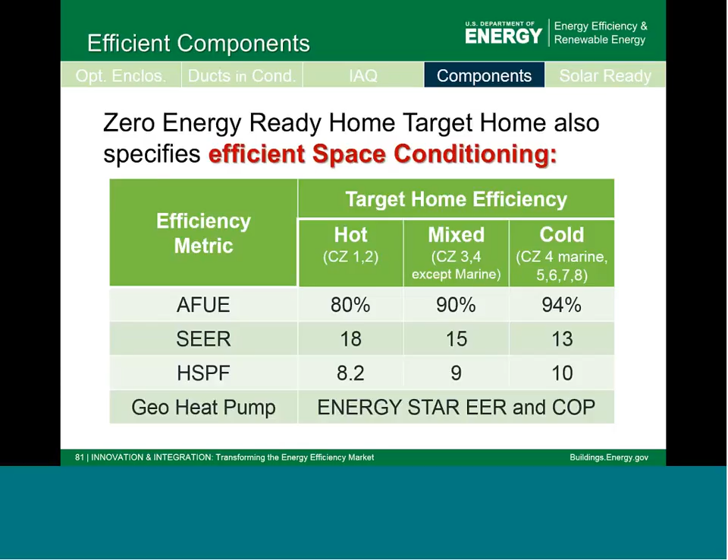But again, I mentioned the efficient hot water distribution is the one component requirement that gets the most questions. So let me spend a little more time with this.

There are three options. One's a core plumbing layout, sometimes referred to as a wet wall, where your fixtures are so close to the source of hot water that there's very little waste or wait time. Another is a manifold system, where there's a home run of pipe from a manifold to each fixture, so again there's minimal waiting time and waste.

And the third is a recirculation system, where you run a structured plumbing loop throughout the house and have a pump that can, on demand, circulate water.

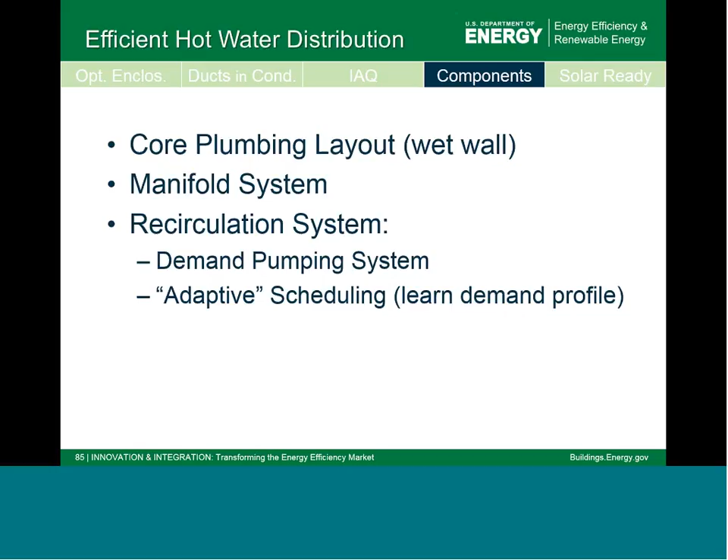It'll either be a demand pump that you use with a switch or a sensor control, or it'll be an adaptive scheduling pump that's built into instantaneous water heater systems, which learns your demand profile and provides water on demand based on how you use hot water.

Here's a core plumbing layout, just as an example. You have the laundry room with a hot water heater right there, against that wet wall. All these plumbing fixtures are basically right against that wet wall, except for that one lavatory, which is also within shooting distance and would probably meet the requirements for not wasting more than half a gallon of water once you turn on the hot water spigot.

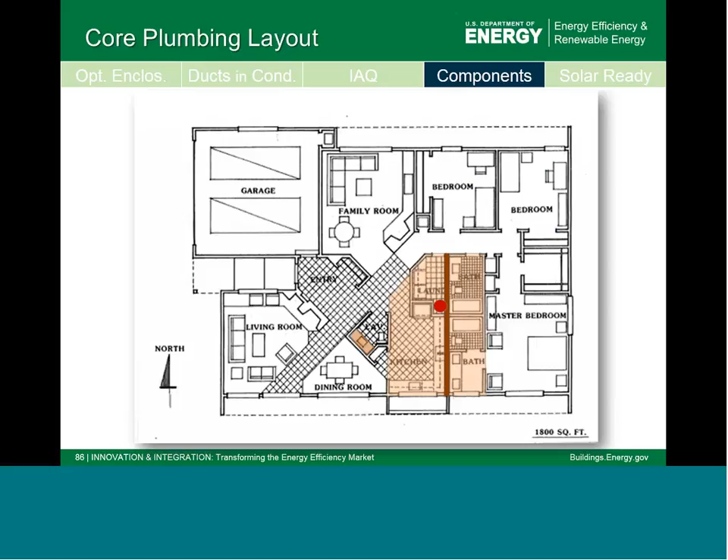The other way to do it is with the manifold system. Again, there's a home run from a manifold that has to be within 10 feet of the water heater, and with a half-inch line, you can probably go up to 30 feet and still meet the program requirements. With a 3/8 line, you can go past 30 feet, depending on how you choose to meet that requirement.

Here's the demand pumping system. Again, it's a structured plumbing loop with a dedicated return to the water heater. There's the sensors and controls, there's a dedicated return, and there's the pump near the water heater. When we turn on a switch, or there's a sensor that knows we're in the room, it operates the pump, and virtually every fixture will have water. Then when I turn on the fixture, there'll be hardly any wait time or waste.

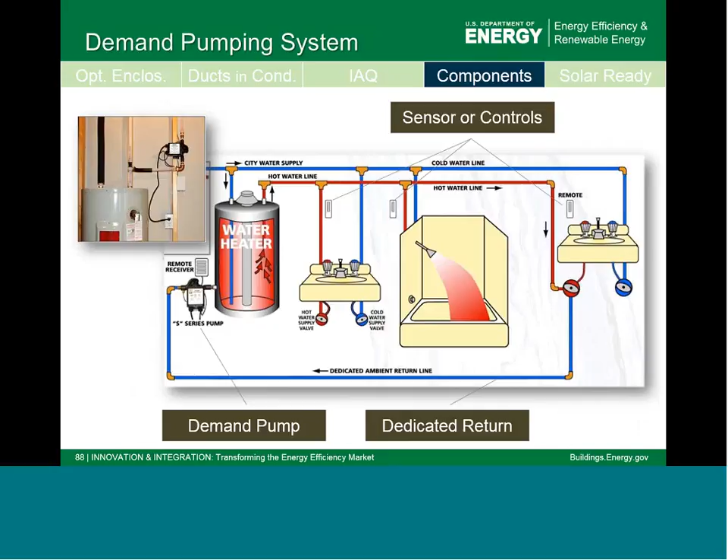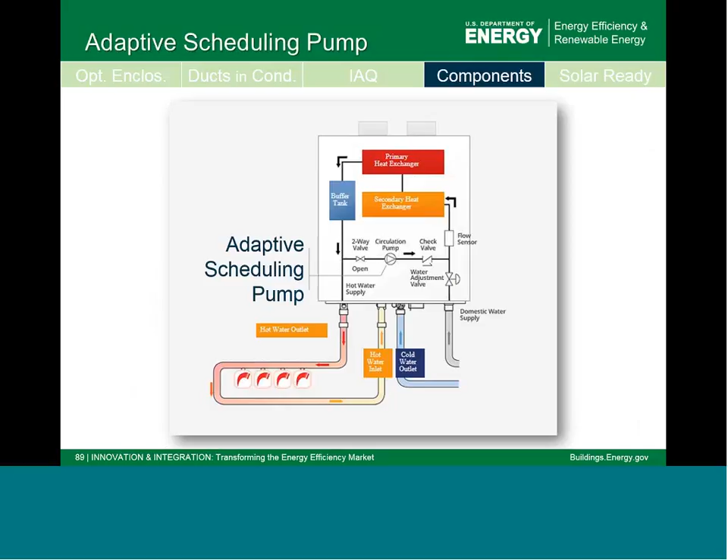And the last system I mentioned is an adaptive scheduling pump. This is one instantaneous water heater sketch that shows the circulation pump in the water heater that learns your demand and circulates water on that demand.

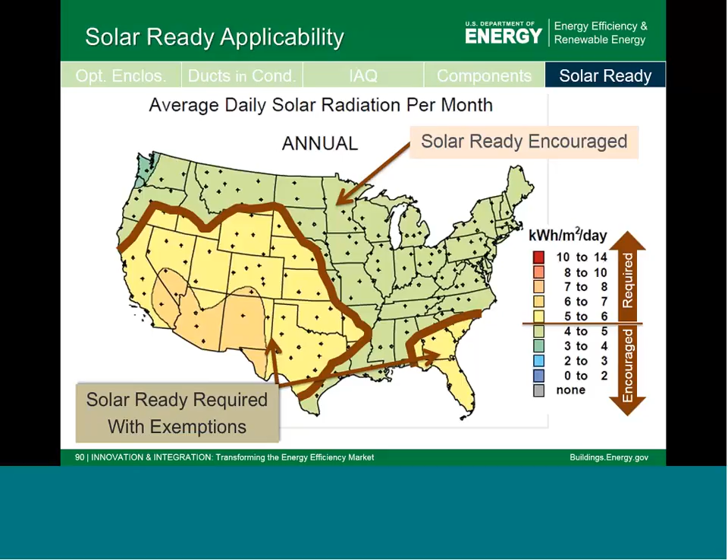The last program requirement is solar-ready construction, but it's geographically required and encouraged in all other locations. Here are the geographic regions where it's required—locations in the country that get 5 kilowatt hours per square meter per day of sunlight or more—and everywhere else it's highly encouraged to meet the program requirements.

Essentially what you do for solar-ready construction is have documentation that the maximum allowable dead load and live load ratings of the existing roof meet those required to add on the collectors in the future, documented and signed by an engineer.

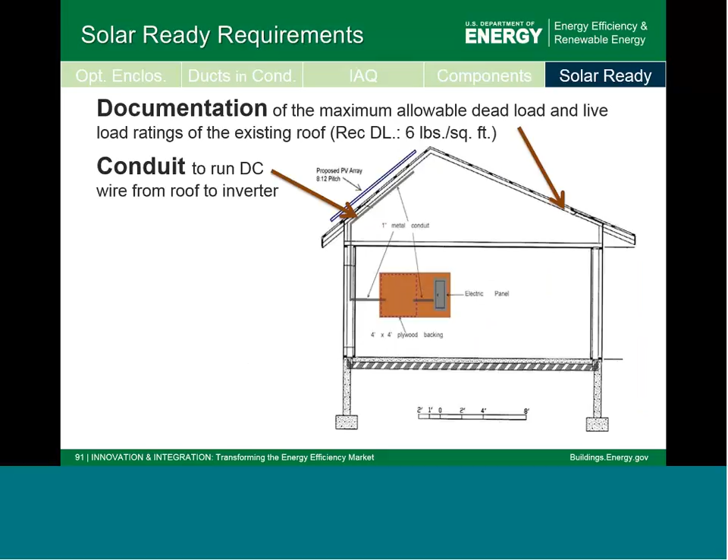You give the homeowner also a place to run wiring with a 1-inch conduit going from the attic to the electric box. You provide a dedicated area for the inverter and balance of system components, conduit connected to the electric box to run from that area, and circuit breakers in the box so you don't have to change your box when you put solar on in the future. Very, very low cost or no cost details that can make your house ready for solar with hardly any disruption or cost penalty.

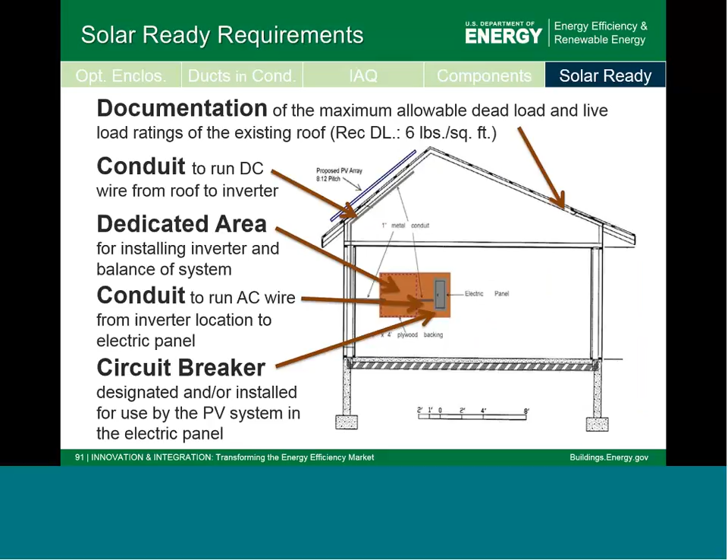So let's graph the spec to make sure you understand what we're doing with Zero Energy Ready Home. We're taking a minimum code building, and we're going to knock off at least half the energy use, sometimes 60 or 70% in some cases, but generally about half, and you do that with optimized, efficient enclosure and components. But to manage the risk, we also add performance requirements for moisture protection, comfort, properly installed systems, comprehensive indoor air quality, and solar-ready construction. And you are Zero Energy Ready.

And in the future, you can always add renewable systems either on-site, be part of a district system, or even buy offsets to take your carbon footprint down to zero.

We always like to still use the word 'ready' because there are so many factors that can lead to a non-zero utility bill experience, which most homeowners would expect. It could be they have more occupants than planned for that home. It could be a severe weather year. It could be so many different equipment components that use lots of energy being added—things like swimming pools, hot tubs, gaming machines—who knows what gets thrown into the house? That's really out of control of the builder. And even the utility could add on service charge requirements to buy renewable power from the home that can add costs leading to a non-zero experience. So I think the word 'ready' is a very powerful word to manage expectations for homeowners.

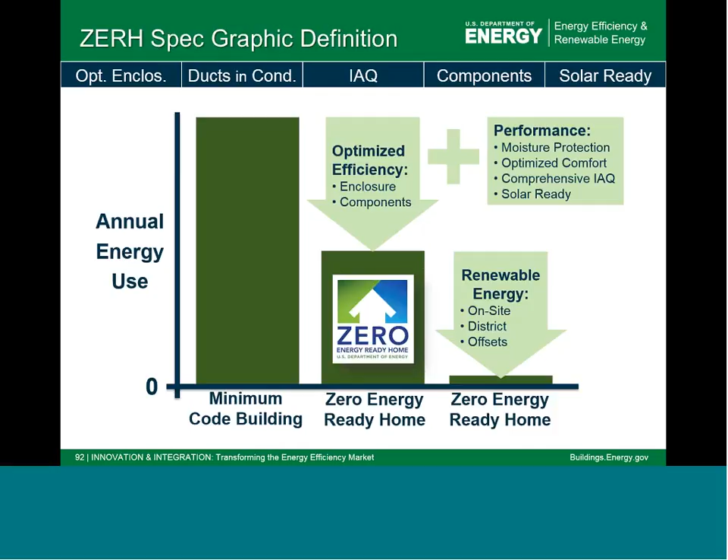The last part that leaves us with is how do we become a partner and work with this program. This will be just a few more slides to wrap up.

The first thing is just to register online at the Zero Energy Ready Home website. If you go to any of your favorite search engines, type in Zero Energy Ready Home, it'll be the very first item listed. Go to the program requirements, review the guidelines, review the partnership agreement, and then fill out a very simple form that takes a minute or less, maybe a couple of minutes.

You will have some choices for some extra credit special recognition if you do 100% Zero Energy Ready homes, if you also do the WaterSense label, if you do disaster resistance with the fortified home label, and if you want to indicate that you're meeting Zero Energy Ready Home quality management recommendations for helping to ensure consistent quality, there's a quality management icon as well.

Then you'll have certain responsibilities. One is to take an orientation training course. It's about 45 minutes and available online. Much of what I'm doing here right now with you would qualify as the orientation training.

The other requirement as a partner is to provide a certificate for each home that meets the Zero Energy Ready Home program. That will be printed out straight from your HERS software. Note that in the near future we expect to use HERS registry at RESNET as our source of certified homes, so this requirement may be relaxed in the future.

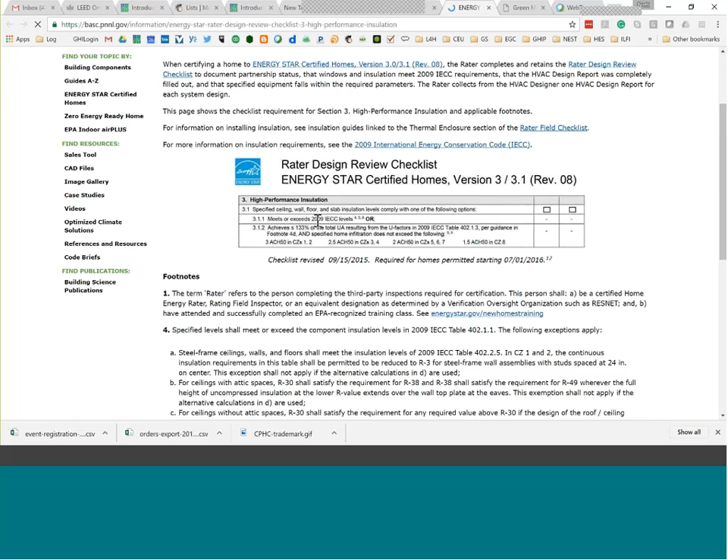The next tab gives you code compliance and other program requirements that specify this measure, with direct links to them. Then there's information on how to get more precedents and case studies, and it connects you to case studies using those measures. And the last new tab is called Sales - it gives you an actual summary page for people that sell your homes, with a translator of that technical term into an experience-based term.

So a ventilation system, let's say, becomes a fresh air system. So we go from the technical function of ventilation to the experience of fresh air. And then it'll give you a quick description that a salesperson would mostly need versus a much more detailed description we have in our Solution Center. And then it will give you alternate terms for that measure, and then it'll give you a script to give your salespeople. So there are the tabs across the top that I was just referencing.

And you can see how it just takes you to all this information. The training tab, you click next, has the pictures, the videos, and it has all the other information. CAD will be, if you have CAD drawings, compliance is the links to the standards and code references. More is more information, case studies, and unreferenced documents.

And the sales tab is the one I mentioned last - in this case, aligned air barriers becomes a draft barrier. You have a short technical description. You have alternate terms: air containment barrier, energy saving air barrier, moisture control air barrier. And if you scroll down a little bit, you'll see the script for the salespeople that basically says whole house draft barriers block airflow that can undermine the thermal protection with a complete high performance insulation. But the key thing is, salespeople need a lot less content.

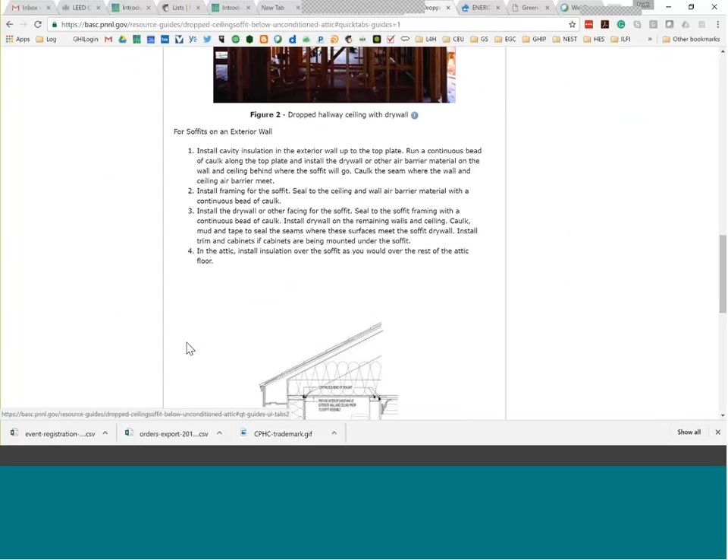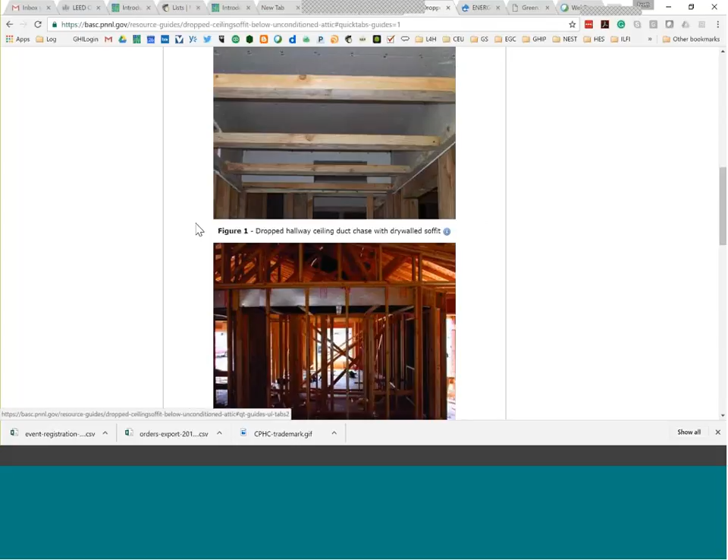For virtually over 230 different guides that have been prepared on everything involved in high-performance homes. And what's so significant about this is often we go to a document, we don't know if it's the latest document, and I should worry about something new coming out that supersedes it. This is a living document. It's not fixed content. It's a database.

So at any time our technical teams in Building America, our research laboratories, our user base gives us content that's updated, we simply go into the database, pull out the old that's out of date, and put in the new that's updated. So it means whenever you go to this resource, you're getting something that's continually updated, and you'll see the dates for when things are provided listed right below the content as well.

So the Building America Solution Center is an incredible resource. And it was designed to help apply proven innovations. So it's not where you go if I want to design a home - for that you go to HERS software, or you go to BEopt, a great software package DOE has for free. But you can basically use software to figure out what to do, and you go to the Building America Solution Center for how to apply it.

Or let's say you want precedents - you're going to go to a code official, or you're going to go to a builder, and you want to show there's a dozen other homes using this measure. You can actually provide something called a code brief on over 25 different innovations that may be difficult for you to get through a code approval process. There's a whole code brief to help the code official understand and approve that measure much more easily. So learn to use the Building America Solution Center. It's an amazing resource.